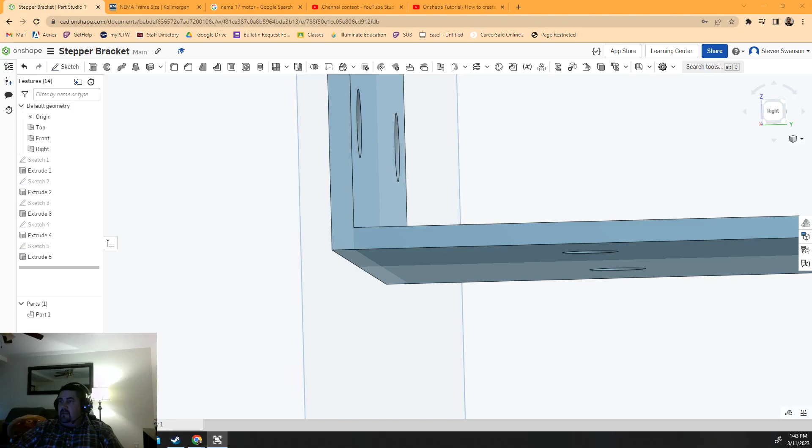So let's say you made this bracket for a stepper motor, or it could be for anything really. It will work, but man, it will snap so easy right here. It's barely just held by this little tiny amount. A professional would have made something called a rib, which connects this to here.

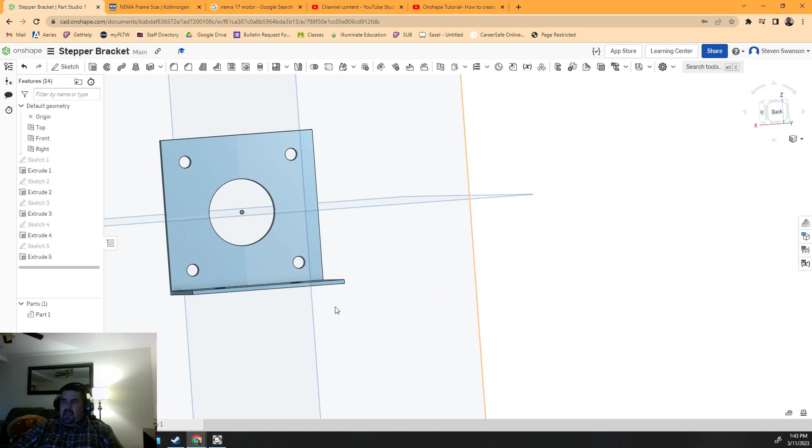So let's do that. I'm going to delete this bottom part off because I don't think the stepper motor would fit in there anyway. Once I added this bottom piece, there's less room down here, and I don't know that these holes will line up to the stepper motor anyway. So I'm going to go ahead and delete these last few things, which was the sketch, that extrusion, and this drawing.

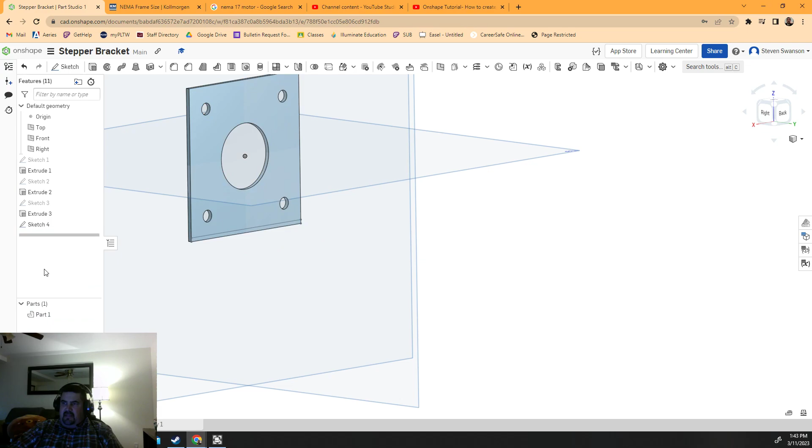Now that I'm done, I have the original plate. I'm going to make it bigger. This is the original drawing right here, made 2 inches by 2 inches. Let's go 2.6 by 2.6. Actually, I could use more room up and down because of the thing, so I'm going to go 2.65. That'll give me a little more room for that plate on the bottom, maybe.

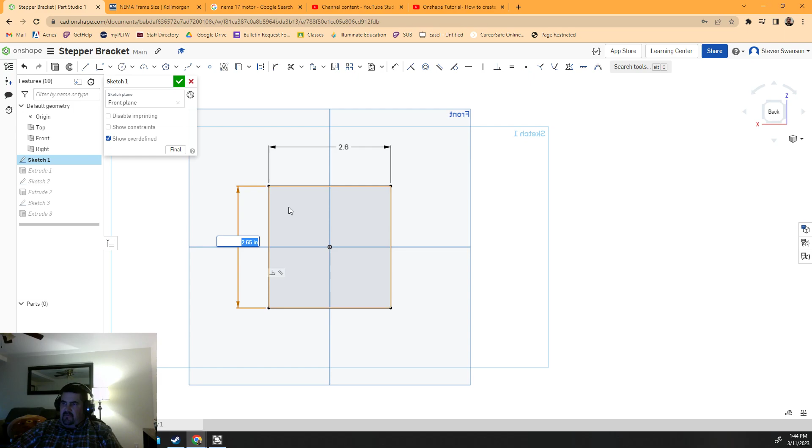Actually, I would rather go more this way, but that's fine. Because I have a little bit more room, I need that plate to be down here. All right, done. So now it is definitely bigger, and possibly room for those ribs now. If you need it bigger than this, you can do that. This is all up to you. These are not exact numbers.

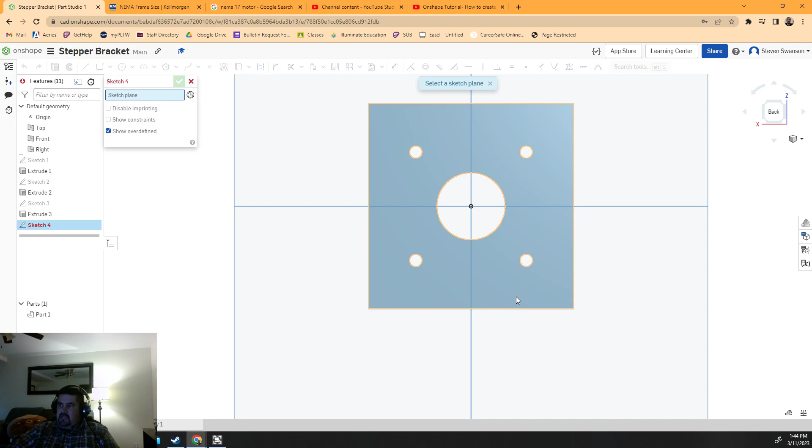Sketch, click this face, and I'm going to draw using a corner rectangle, grabbing this corner and hitting that wall right here. And of course, I just need to adjust that thickness to whatever the thickness of the middle is. 0.05 is the thickness I had it at. It's really thin. And done.

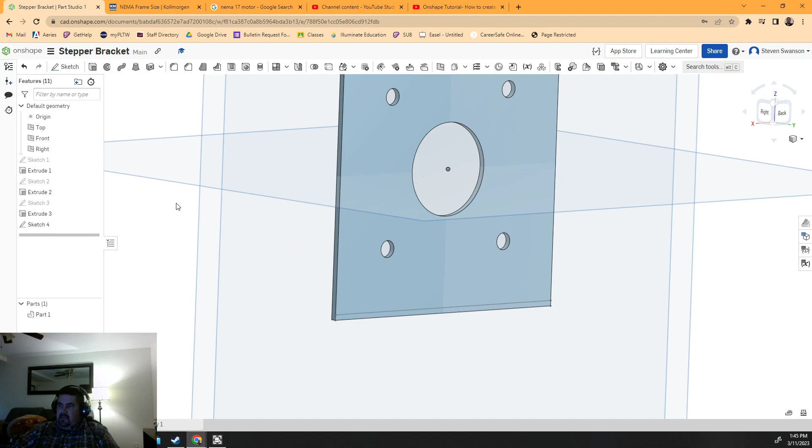Extrude. You can make it thicker, but sometimes you start making things too thick. I'm going to go out like, let's say, 1.5 inches. If you make it too thick, it's trouble finding screws that are that long, then it's real bulky. But thicker is better for strength, that's for sure.

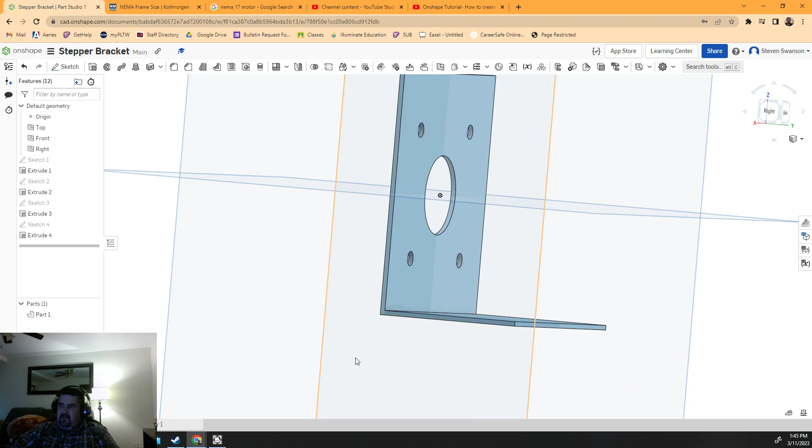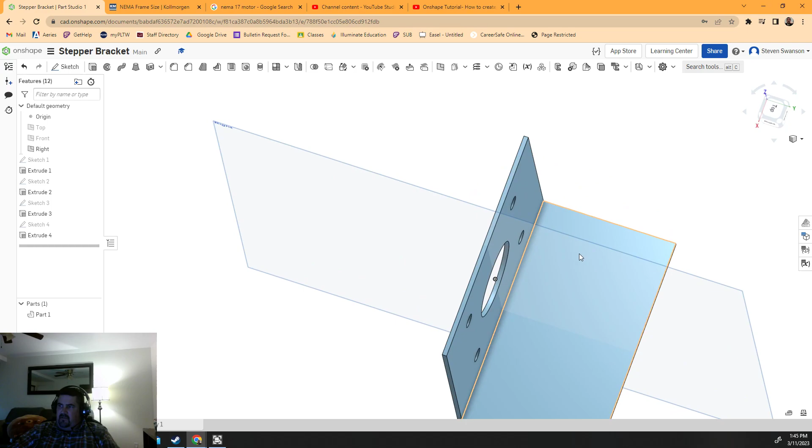So now I'm going to hold it sideways right here. And notice when I draw a sketch, let me see if I can show you this. I'm going to hide the front plane, and then hide the top plane right here. There we go. Notice the one plane I'm showing you is right in the middle right here. So if I want to draw, I might want to draw right here on this edge, not on this plane, because I don't want the rib in the middle.

I want to put 2 ribs on the edges. So I'm going to say sketch on this plane right there. There we go, see how it made a plane right there? So I'm going to do that.

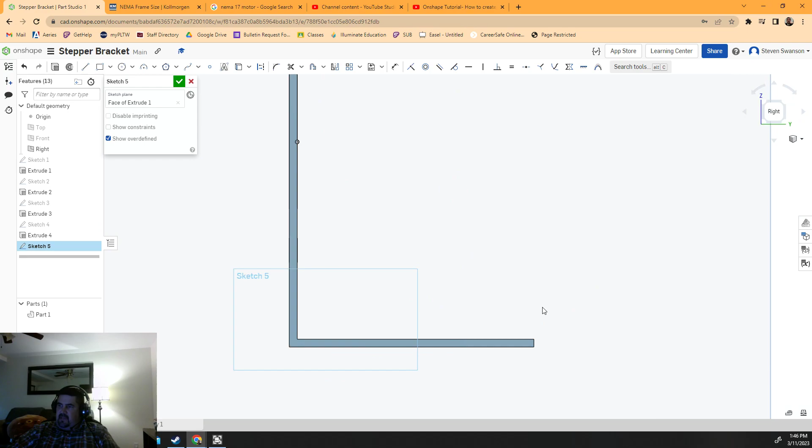And we're going to draw a triangle of sorts. Touch this line, touch this line, we got to close it all the way, touch that corner and touch that line. There we go. Now all we have to do is give it 2 dimensions.

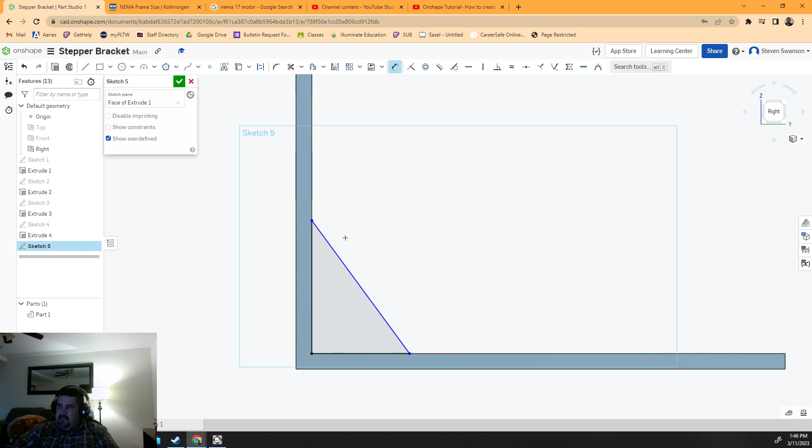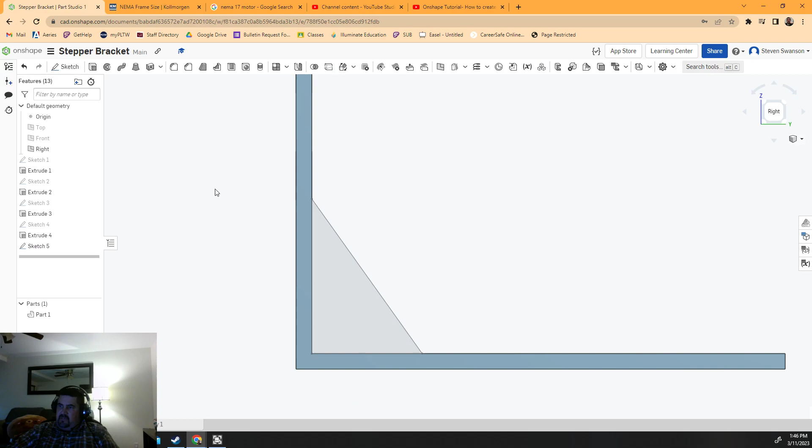We can click this dimension, and this is all up to you. I'm going to go 0.5 inches just to make a nice clean number. And here I'm going to go with... I can do 0.5 if you want it even like that, or if you want it looking a little bit more fancy, maybe get 0.35 and have more of an angled approach. Most of the weight is going to be up here on this guy.

And if you want them bigger than this, you can make them bigger than that possibly. In fact, why not? Let's do that. Let's make it bigger, I'm going to make some huge ribs so it's stronger. So let's go 1 inch up here, and let's go 0.75 inches, 3/4 of an inch that way.

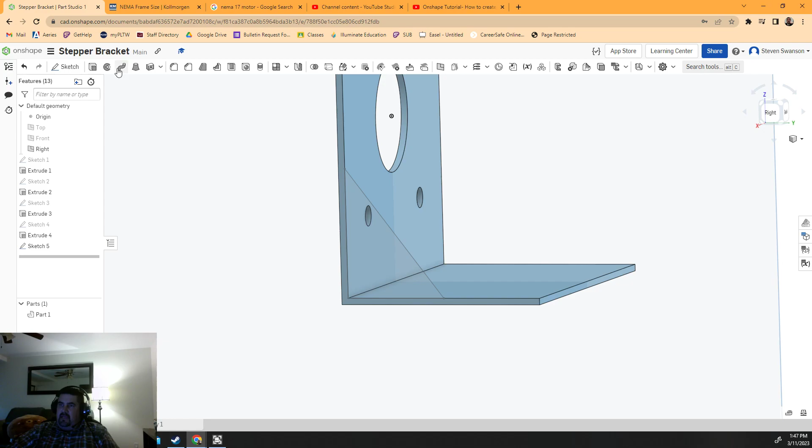Done. Now I'm going to go ahead and click extrude, and we're going to go the other direction. So click this arrow, and I'm not going to cover the hole. Let's go 0.05 for now, that's how thick all my stuff is. And I do have something that's going to make it much, much more stronger now.

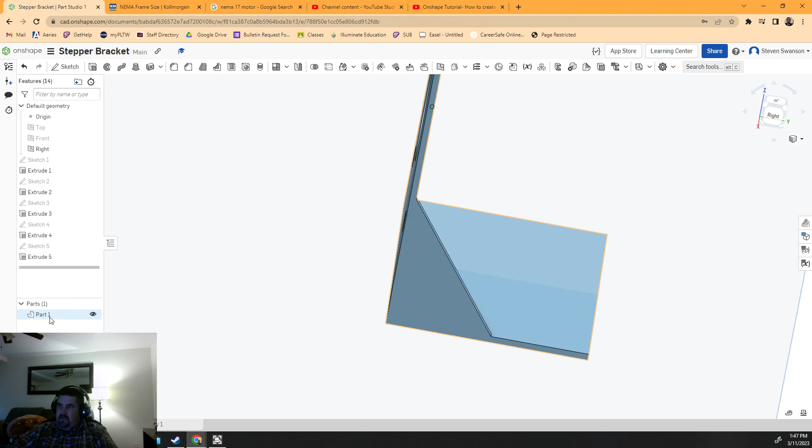Okay, so this is all combined, still one part, and that's going to be much stronger. It's going to be much harder to flip this and break that off. That has this, and we'll add one to the other side. We can go ahead and draw the other side, do the exact same thing and add a second one.

You can also try to do there's actually a rib feature to do these. I don't want to go over that tutorial, but there is a pattern feature. I think is it this one? Mirror? Let's see, mirror. Part mirror? No, not the whole part, just a feature. What feature? I can't click this by itself, so I'm going to click my extrusion.

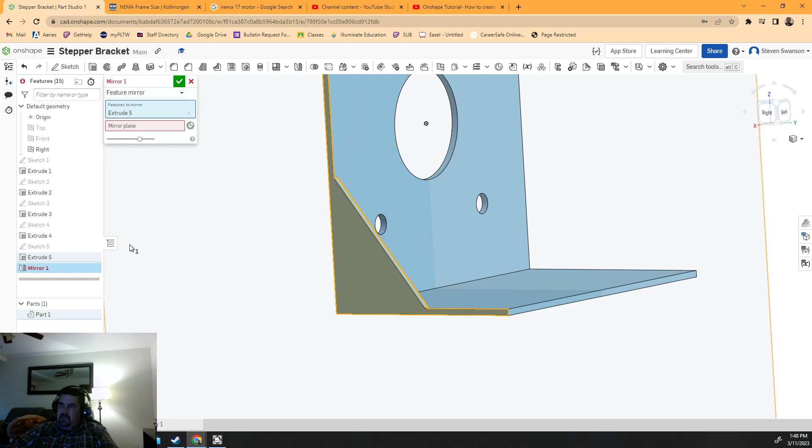There you go. And then mirror plane. Oh, the mirror will be this. Remember, this is halfway in the middle. So click that, I'm clicking that plane that was right in the middle, and that was the plane. There we go, and it looks like that worked.

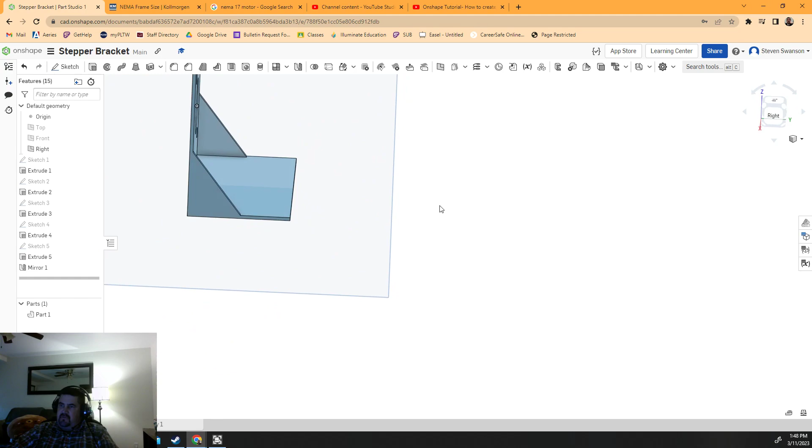If that doesn't work, you can always just draw the other side and just repeat. That's going to be much stronger, much stronger. If you want to go all the way to the back, it might even be stronger, who knows? So this is definitely a way to go to make your part stronger. It's more professional and it's more legit. All right, guys?